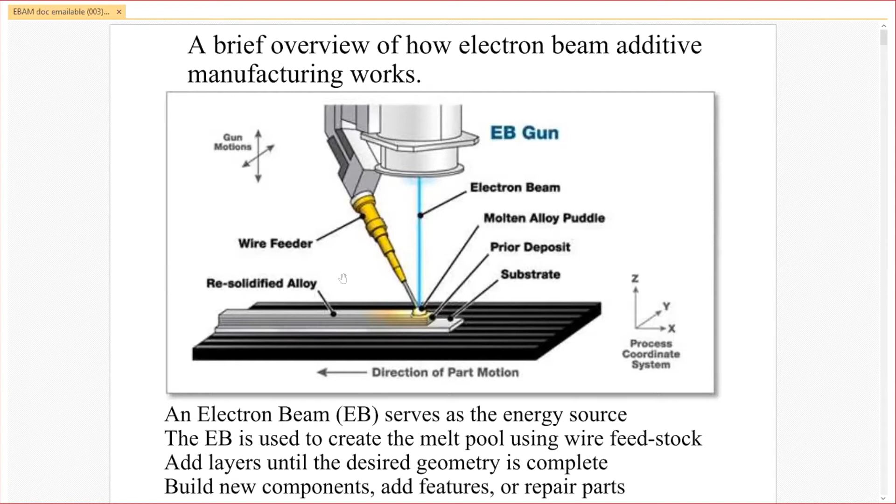We have it in a very large vacuum chamber. As you can see, this is not an adorable little powder bed additive manufacturing machine. This is an enormous machine. This machine here is our small model, which is 110 inches across by 110 inches high by 110 inches deep. So these are giant vacuum chambers.

The reason why we have vacuum chambers is very important because as the metal is fully liquid, it removes a lot of the porosity that you would get with your other traditional metal additive manufacturing methods. So we can print, I know metallurgists will roll their eyes and say that there's porosity in everything if you get down small enough, but we have porosity at a level that you would see with ingots and forgings and things like that. So it's fully liquid in a very large vacuum chamber.

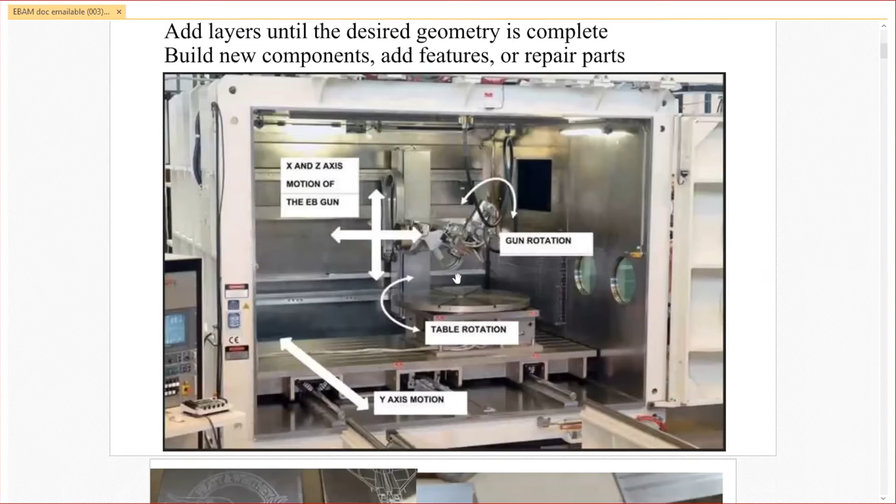And then now here you're seeing some of the different angles that we can do depositions and welding. Oh, also, every one of our machines is also an electron beam welder. So they tend to last a very long time. We can weld everything from, this is like a stainless steel foil, and that's 5 inches of stainless steel. So here you can see the penetration on it.

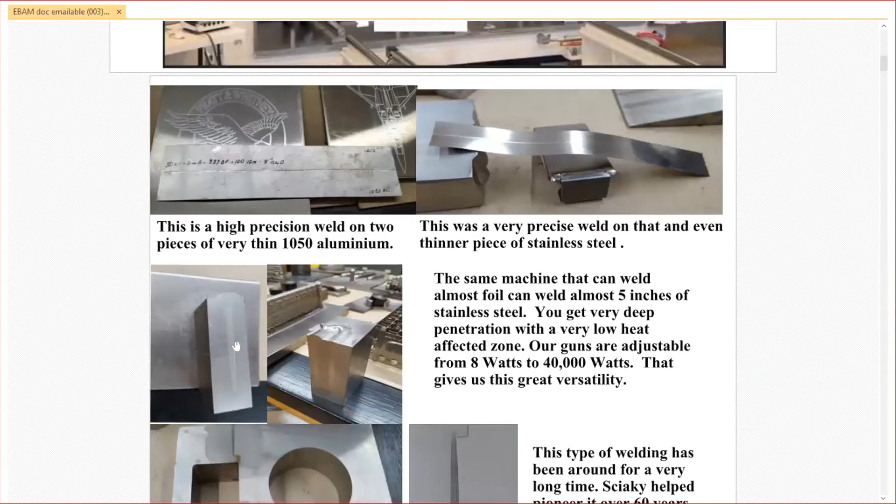So what we get with our welding process is a very deep penetration with a very small heat affected zone that reduces warping and things like that. These are examples of some of our welding capabilities and the things that we've done, the way that it works.

Now, this is an additively manufactured part that would traditionally be a forging, where you would have to buy, on a part this size, a couple of $100,000 worth of tooling, and it would take forever to make. Then you'd have to have a press and all the other things. This is just a piece of plate that we get here in the States. A lot of our government and military has to source from Russia to buy parts to shoot down Russian missiles, which no one thought was a bad idea. But this comes from Pittsburgh and the wire comes from Ohio.

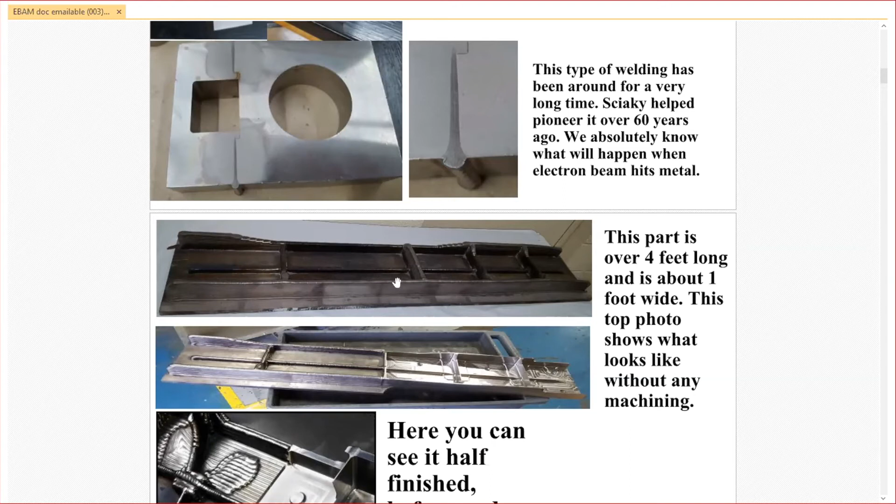So this part here is about 4 feet long and the deposition took about 2 hours. Our deposition rate's about 25 pounds an hour. You can see where we built that up. And then here you can see where half of it was finished and then half where the plate was cut away. The plate is left in to help with the machining process, and then it's consumed in the part. And then this is a little better view of it here.

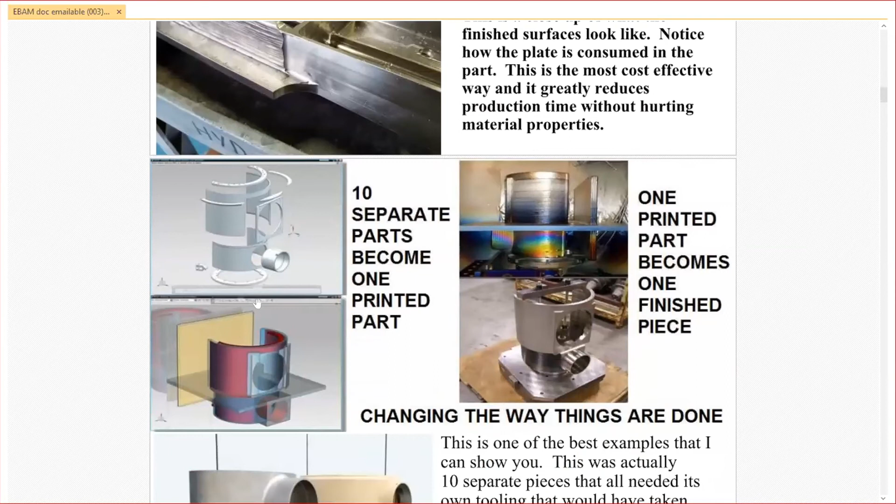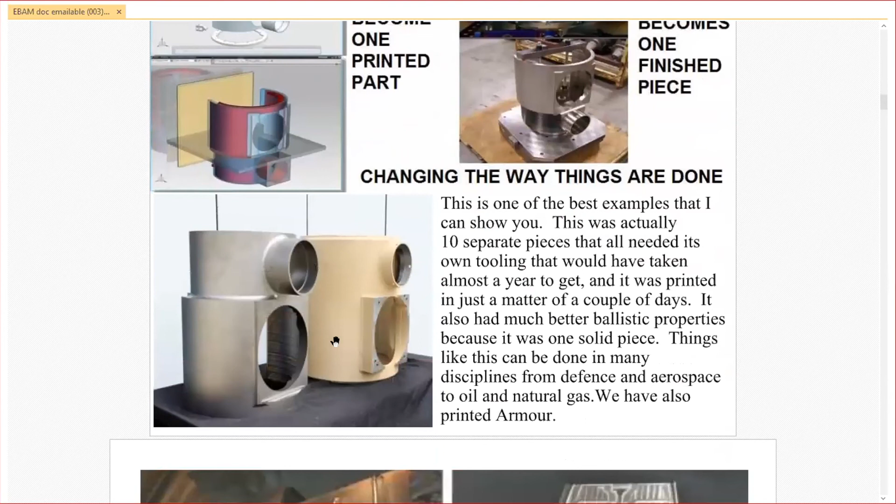But just to scroll through in the last 60 seconds, this was a part we did for General Dynamics that had 10 separate pieces that they couldn't get the time or the tooling for in time for their part. So we printed it all at the same time, and we even printed a ballistic plate at the same time. So, and this is what it looked like. So this is what it would look like traditionally manufactured. And because ours was manufactured in one piece, it came out more than twice as strong.

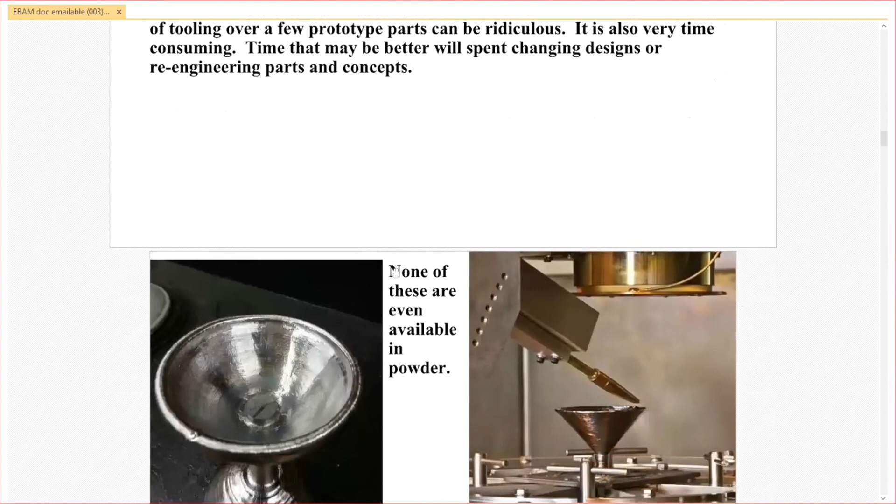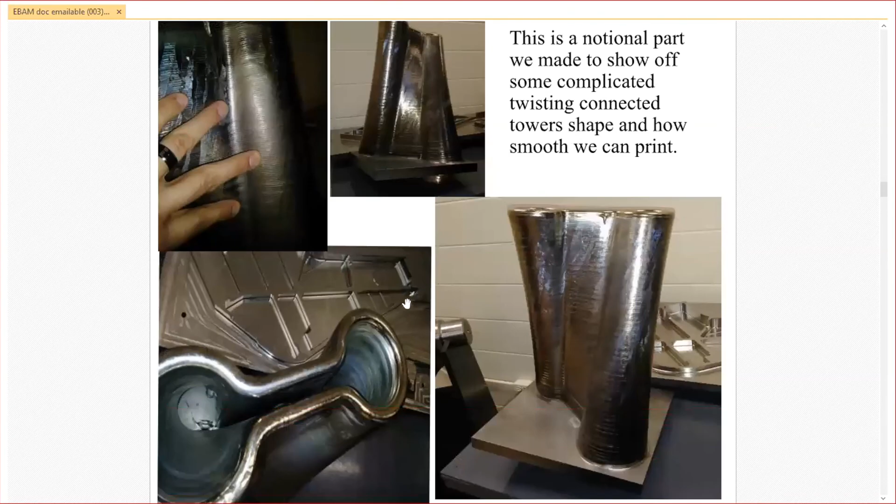And then these are just more examples of some of the things that we've made. These are some of the exotics: tantalum, tungsten, molybdenum, niobium, the flap spar for the F-35. These are some of the different geometries and shapes we can make. These are things for scale.

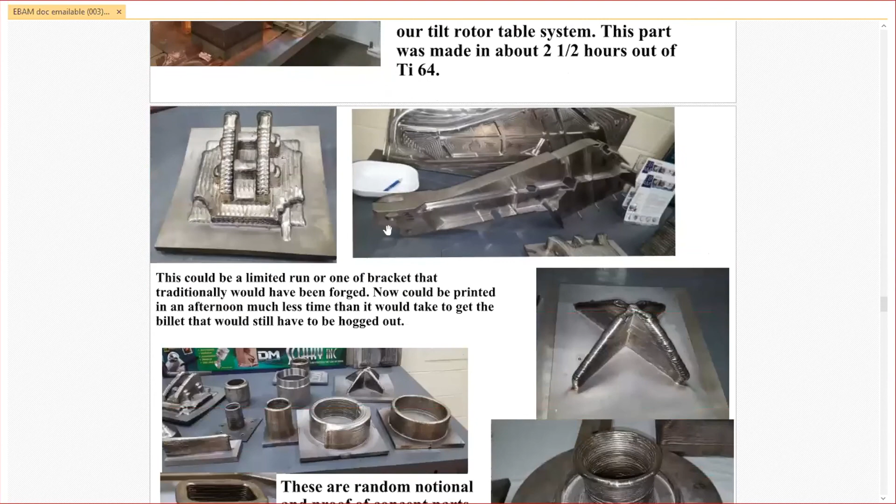These are enormous parts for aerospace, unmanned submersibles, hypothetically rocket nozzles, all sorts of forgings, replacement parts for large equipment. Lockheed Martin has our equipment, and then we make very large things.